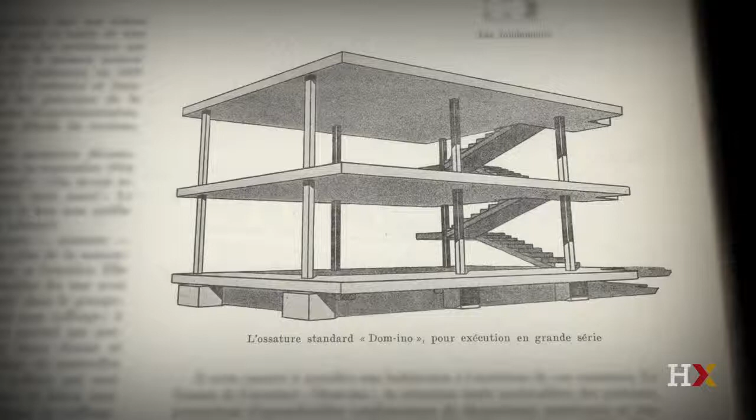It's a diagram that is not yet bound by room layout or any kind of decorative trim. Actually, it doesn't even have an enclosure yet. The walls, the elevations are not on. It's all plan and all section. Nevertheless, the domino would be understood as a kind of primitive hut of the modern. As I say, the domino is all plan and section, no elevational surfaces, no wrapper.

It's proper to understand it really as an emblem as much as a building, a diagram of a new technological and constructional paradigm of mass production, standardization, repetition, and so forth. It's really a prototype of potential of the new technology of reinforced concrete, glass, and steel. But this diagram, with its sort of concentrated energy of slab, column, circulation, and base, contains a lot of implication that Le Corbusier will explore for the next several decades in his houses.

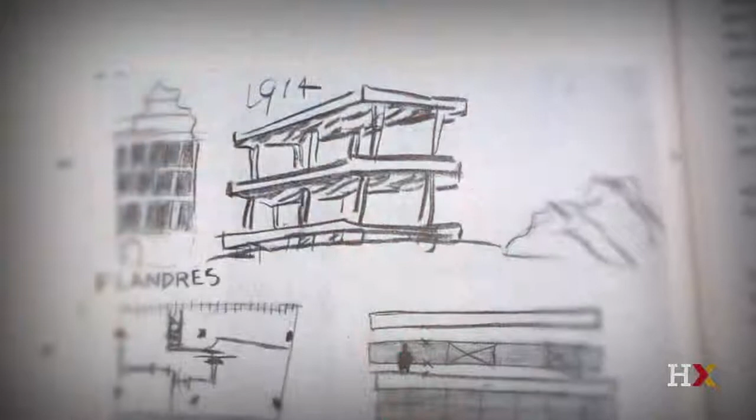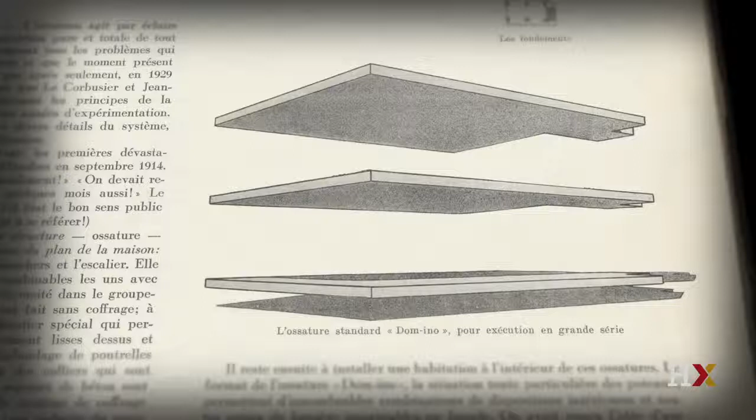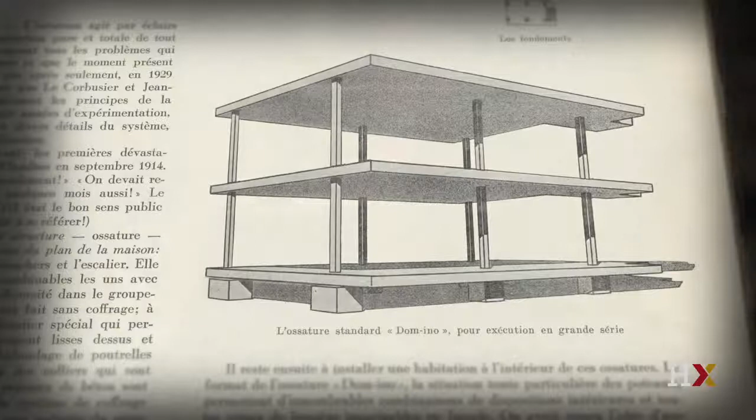So let us look at the domino in some detail. The diagram comprises 3 horizontal slabs. The first floor slab is on 6 sort of box-like footings that raises it slightly above the ground. And then the columns that seem to go through the slabs hold up the next 2 slabs. It's really initially to be read as a kind of constructional integer, a constructional unit that would be the basis for any building. Let's look at it in more detail.

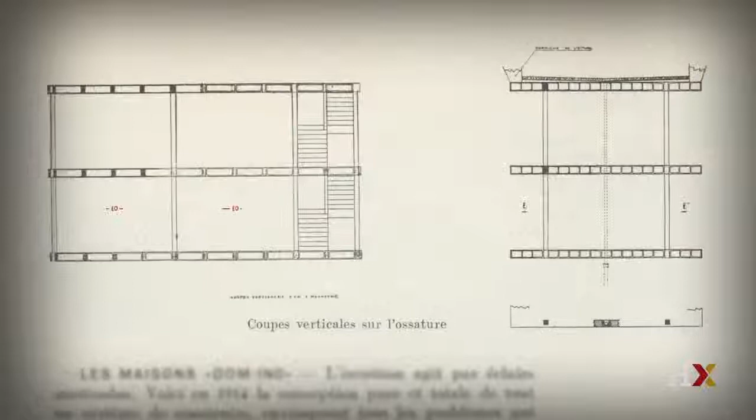The columns are set back from the long side of the slab, and yet they're very, very close to the short sides of the slab. This makes a clear differentiation between front and side. We should remember this because it'll become very important when we see how Le Corbusier develops that. The columns also mark off equal bays. There's a kind of rhythm, there's a rigor, there's a mathematical underpinning to the spacing of the columns, and there's actually a proportional relationship between the bays.

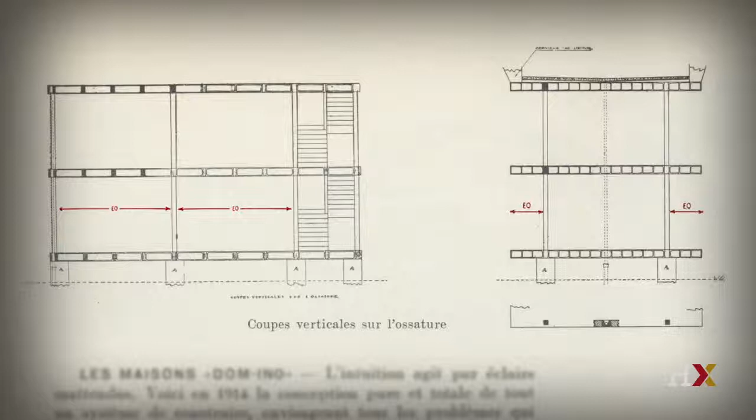The footings emphasize the building's relation to the ground. It's neither buried in the ground, nor is it yet suspended from the ground. It's just pulled up so that there's a distinction between the slab and the earth. The domino is an example of what Le Corbusier called an objet type, or a typal object, or an object type.

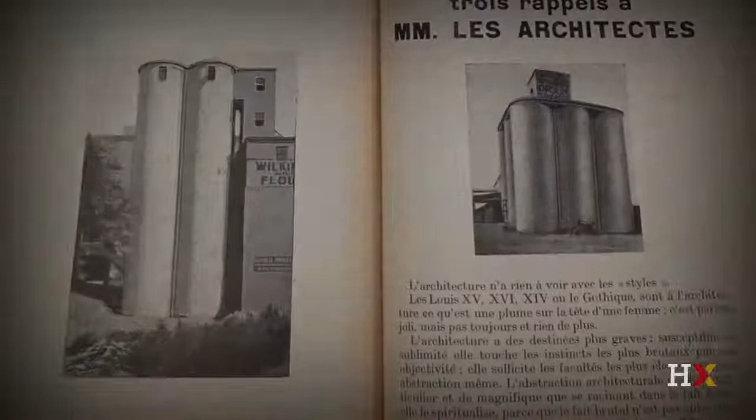In his early sketches and essay, Le Corbusier celebrates the grain silos in North America, these big cylindrical storage containers, along with automobiles, ocean liners, and other accessories of the machine age that he saw as the materialization of pure form. It was in part the volume of these objets types that was important for him. But also the fact that they had been refined over time, that they had become pure forms or these figural volumes through an evolution of use and production.

In his paintings, too, ordinary objects of daily life like glasses and plates or pipes and bottles, guitars and pianos, these appeared to him intensely interesting, first and foremost because of their simple shape, their contour. He thought that volumes viewed in light, even simple everyday objects that were volumetric figures viewed in light, could trigger deep, fundamental sensations and affects.

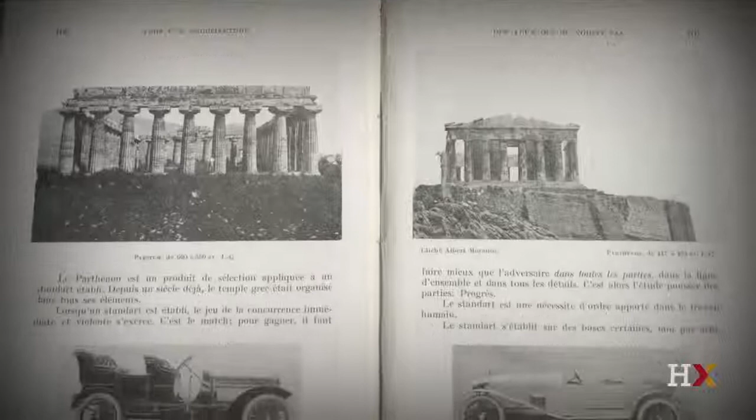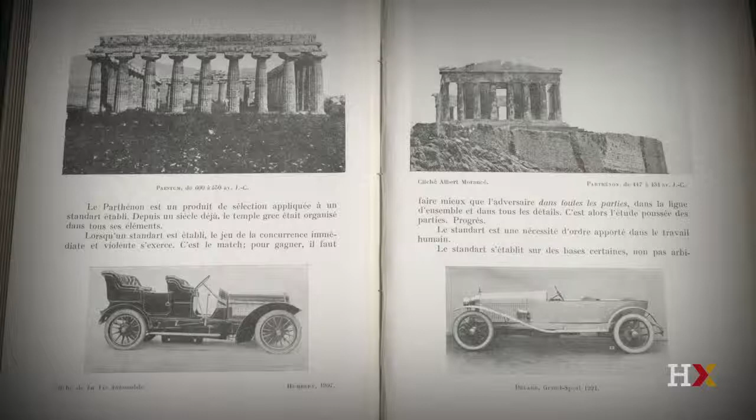Below the Greek temple, you see two automobiles. On the left is the Humbert Cabriolet. This is around 1907. On the right is the Delage Grand Sport of 1921. He compared the Greek temple with the modern automobile, with the machine, to say that they are both objet type, that they are refined over time, but also to make the point that in both cases, one has to start with a standard, a strict sort of diagram of the object in order to move forward toward perfection.

The lesson is that the ancient temple and the modern automobile are objet type that can be refined over time. But you have to start with a standard, a kind of inaugural diagram in order to achieve that perfection.